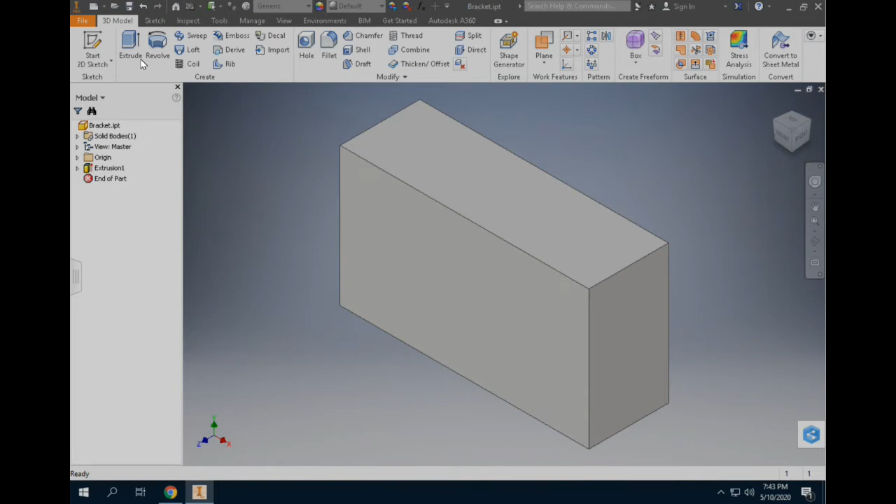In the next step, we're going to add 3 notches to our bracket. 2 will pass all the way through it, and the other one will just be a partial notch. So we're going to start with a new 2D sketch. So I'm going to click the pencil icon and then click on the front of my bracket.

And as always, when we're adding features to existing models, we need to hit Project Geometry and then single click inside the surface we're sketching on, then hit the Escape key. It should be outlined in yellow. So now the base of our bracket is projected onto our current sketch plane. So we're ready to sketch.

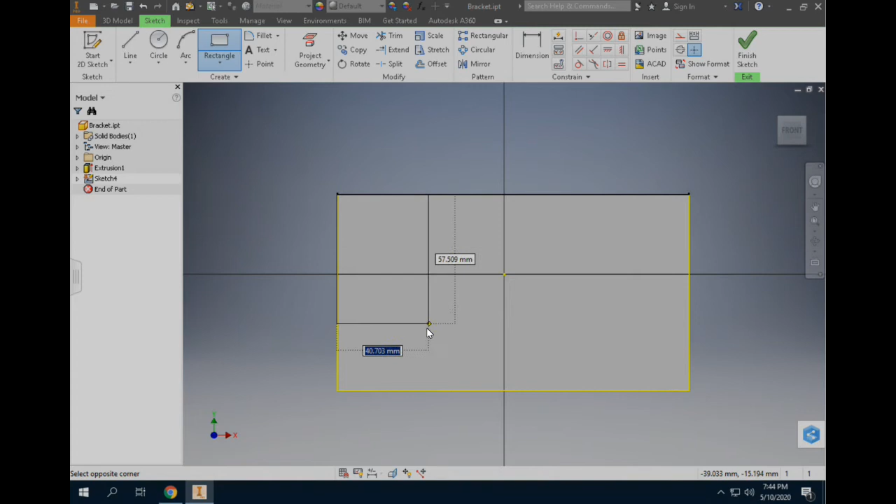So I'm going to choose the rectangle tool. I'm going to start my first rectangle in the upper left-hand corner. I want to make sure that my mouse is right on the corner. I don't want to be off of it at all. So starting right on the corner, I'm going to click and release the mouse. Pull a rectangle out from there, click and release a second time.

Repeat that rectangle on the mirrored side, so on the upper right-hand corner. Click and release. Drag it out. Click and release. Hit the Escape key. I'm going to choose the Dimension tool. And I'm going to dimension the width of this rectangle. So I'm going to start on the left-hand edge, right on the edge, click and release. Go to the right-hand edge of the rectangle that I've drawn, click and release.

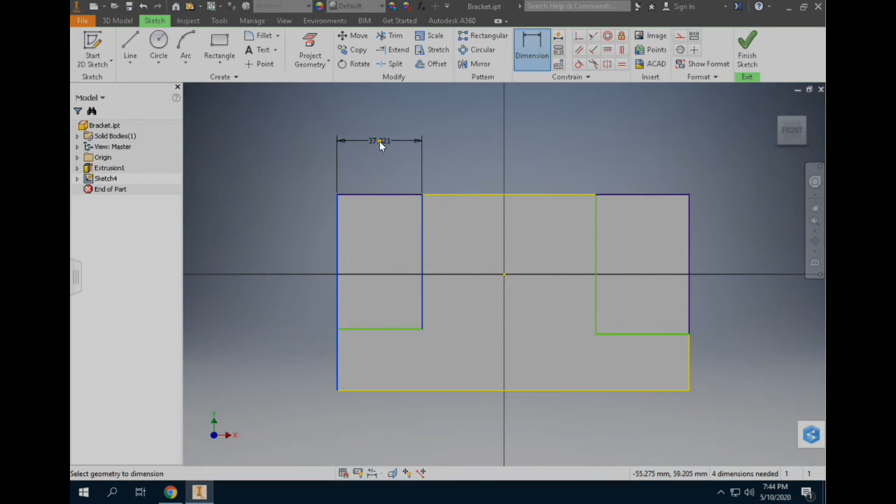Pull that dimension up and click a third time, and that's going to be 32 millimeters. Repeat that operation on the other side. So I'm going to click on the end of my bracket, click on the left-hand side of that rectangle, pull that dimension up, click a third time. Again, that's 32 also.

Now for the height of these notches, I'm going to go to the top of my bracket. Then I'm going to click on the bottom of this rectangle and then pull that dimension out. Click a third time. That's 65. Repeating on the other side. Click on the top line. Click on the bottom of that rectangle. Pull that dimension out. Again, 65. Both of those rectangles are fully constrained, so we're ready to extrude.

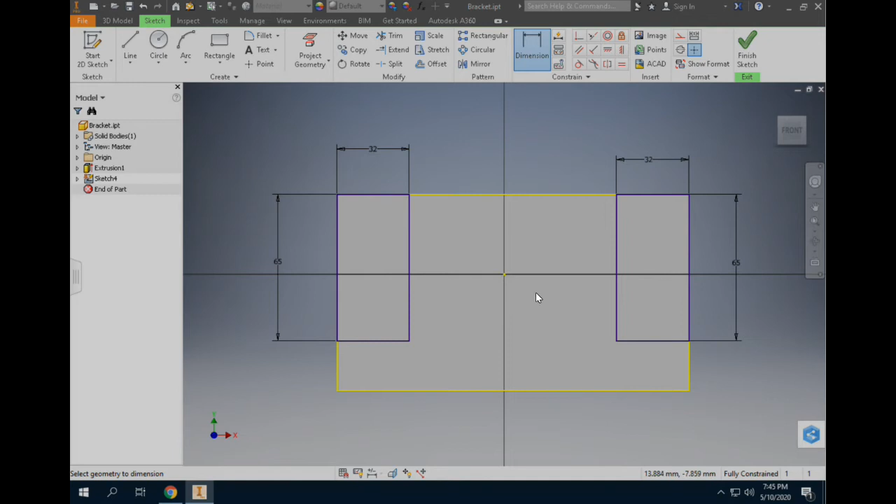So I'm going to hit Finish Sketch, Extrude, and now I'm going to click inside each of those rectangles. Make sure when you click in this rectangle, it's a lighter gray, while the rest of it is a darker gray. And I'm going to choose the cut option, so that should flip it around. If it doesn't, you might need to click this button. It should do it automatically though.

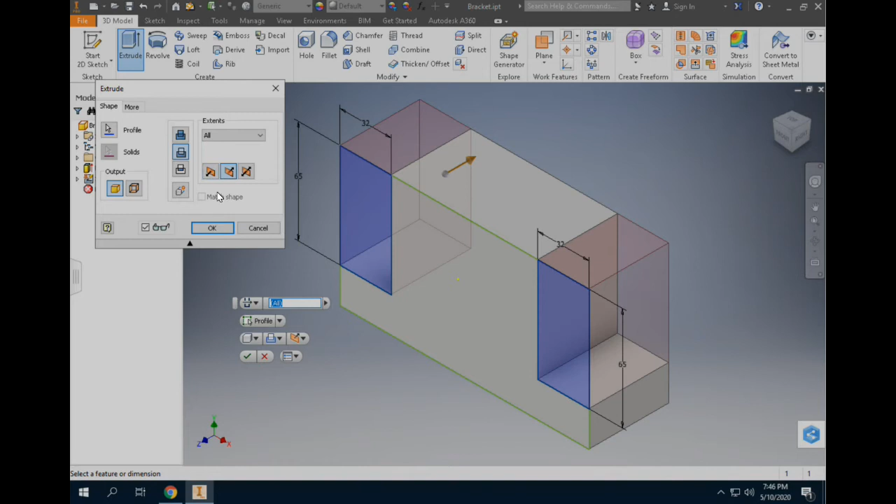And then change that from distance to all. Those notches are going to pass all the way through the bracket. And so now our second extrusion is done. And now we're going to add a partial notch in the middle. So I'm going to start a new sketch. Click on the front of my bracket. Project Geometry. Single click on the front of the bracket and hit Escape.

I'm going to choose my rectangle tool again. I'm going to start right here on the top edge. Notice that the cursor changes when I get on there. So I'm going to click right on that edge. Pull a rectangle down, doesn't really matter how big right now. Click a second time, hit Escape.

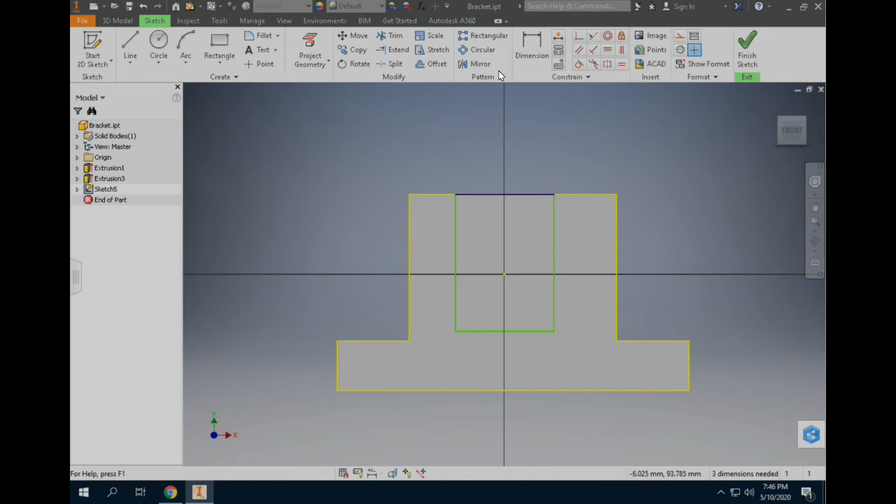I'm going to choose the Dimension tool, and I want the height of this to be 58. So I'm going to go from the top edge of the bracket to the bottom of that rectangle. Second click, drag that dimension out, 58. And then I'm going to go a specific distance from each edge, so from here to here. Okay, so I'm going to click on the left edge, click on the left edge of that rectangle that I've drawn, drag that up, and that's going to be 21.

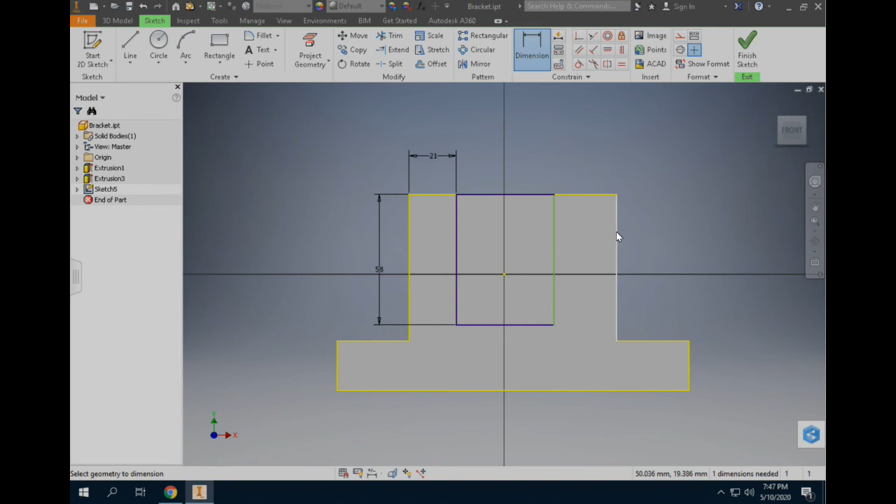Same thing on this side. I'm going to click on the right edge of my bracket and on the right edge of that rectangle, pull that dimension up, 21. And we are now ready to extrude. So I'm going to hit Finish Sketch and the Extrude button. I'm going to click inside that little rectangle.

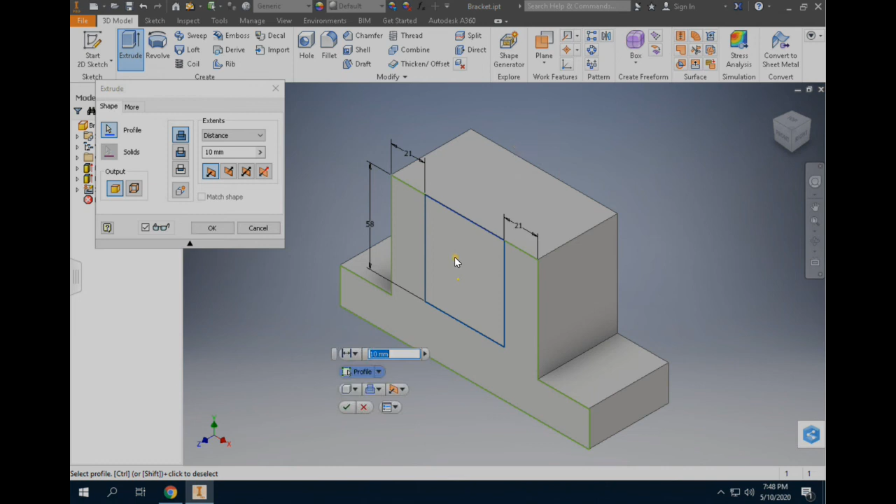Again, I'm going to choose the Cut option, and this time instead of going through all, I'm going to change that from 10 millimeters to 27. And then I'm going to click OK. And our bracket's really starting to take shape now. It should already be called bracket because you should have saved it

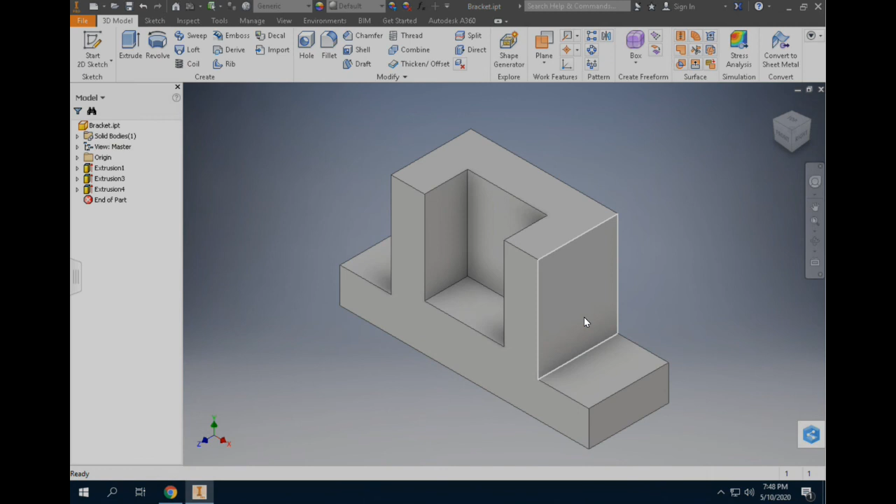in the first step. If that's the case, you can just hit the Save button here or File and choose Save. You do not need to hit Save As as long as you've saved it in the correct spot to begin with. If you want to double check that, you can hit File, Save As, and just make sure that it's saved in your Inventor folder, which mine already is, so I'm not going to hit Save. I'm just going to hit Cancel. And that concludes this step.